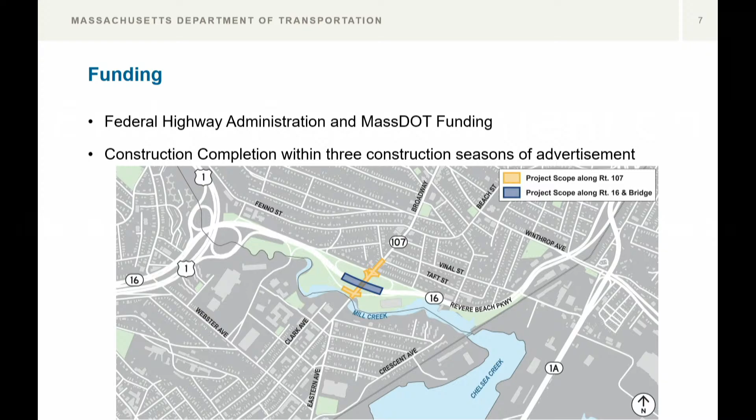In 2021, Massachusetts Department of Transportation issued a design notice to proceed for Howard Stein Hudson for their design services. In August of 2022, Howard Stein Hudson submitted the preliminary structures report, and it was approved by Mass DOT. Then a subsurface exploration program was conducted, with the bridge type selection worksheet being approved in October of 2023.

Mass DOT reviewed the pre-25% conceptual design in January of 2024, and you may remember, if you were here in March of 2024, we presented that conceptual design at a public information meeting. In July of 2024, the 25% design was submitted to Mass DOT and then approved in early winter, and we're here tonight to present that to you.

So what is our agenda tonight? We'll begin with the project location. Then we'll talk about how the project was initiated, including the existing conditions of the bridge. We'll discuss the goals of the project, the alternative analysis and proposed design, our anticipated construction approach, how the construction may affect our roadway users, the next step after tonight's design public hearing, and then we will open the meeting up to questions and answers.

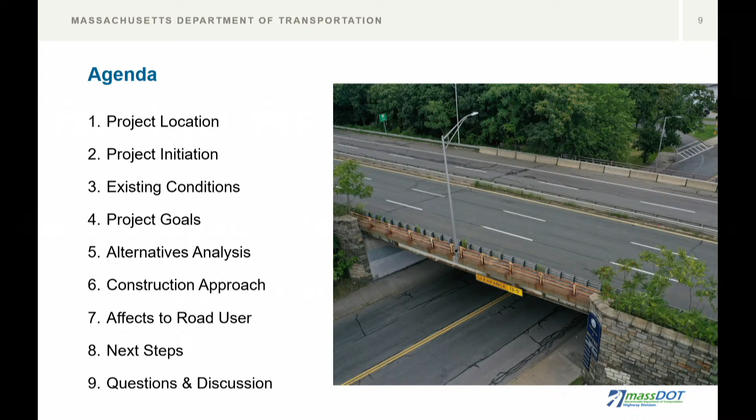So where is the project located? The bridge replacement project is located on Revere Beach Parkway over Broadway. The project scope also includes improvements at the intersection of Revere Beach Parkway eastbound and westbound ramps and Broadway, or the residential portion of Revere Beach Parkway. The project along Broadway stretches approximately between Mill Creek and just south of Taft Street.

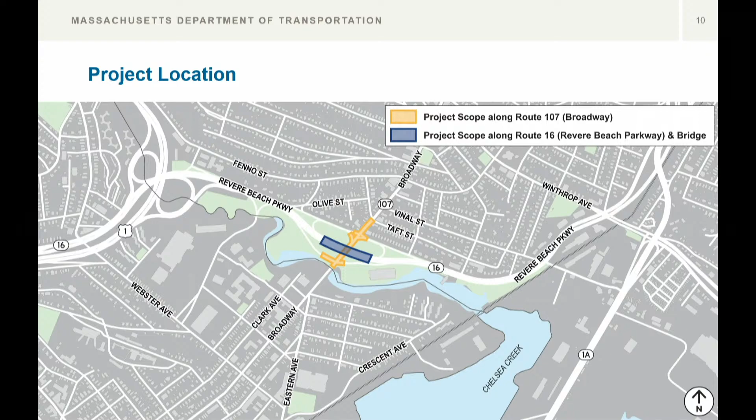So how was this project initiated? The bridge was built in 1930 and then widened in 1958. As you know, the bridge is vital to the Commonwealth as it provides local connections between Medford, Everett, Chelsea, and Revere. The bridge also provides regional connections between Route 1, Route 1A, and Interstate 93.

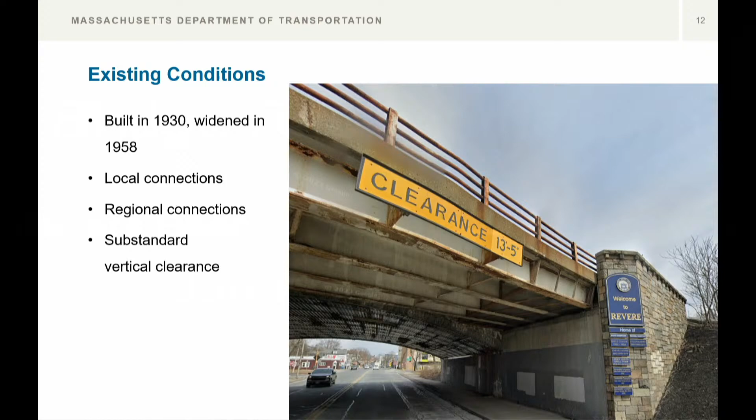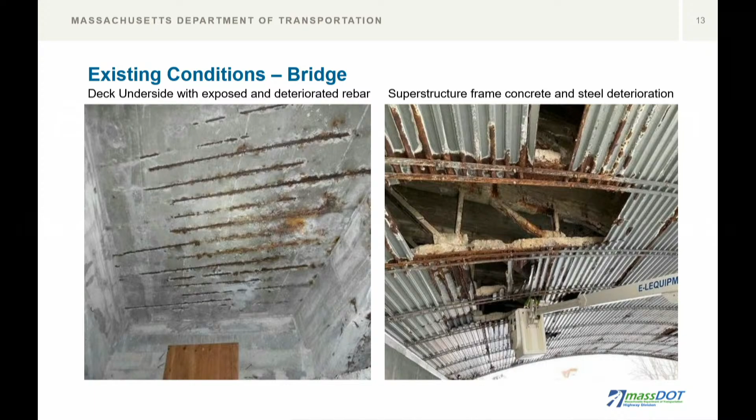The existing bridge over Broadway currently provides substandard vertical clearance. As you may be aware, the reason for the project is that the existing bridge is in poor condition. There are numerous noted deficiencies, which is why Mass DOT has identified this bridge for replacement. Shown in the left photo is the underside of the bridge, where you can see exposed and deteriorated rebar. The photo on the right shows the superstructure, or the top portion of the bridge, with frame, concrete, and steel deterioration.

The existing bridge is currently undergoing structural repairs. That project is separate from this Mass DOT project, and it was initiated by the District 4 office. Our project team has been made aware of the repairs and have been kept in the loop so that we could determine if there are any conflicts or concerns from that project that would affect this full bridge replacement project.

The pictures shown here are from Mass DOT's latest bridge inspection, performed in May of 2024. As you can see, there are areas where the concrete has completely spalled or separated off from the existing steel trusses that are heavily deteriorated. The inspection is what prompted District 4 to take action to begin the repair prior to the bridge's full replacement.

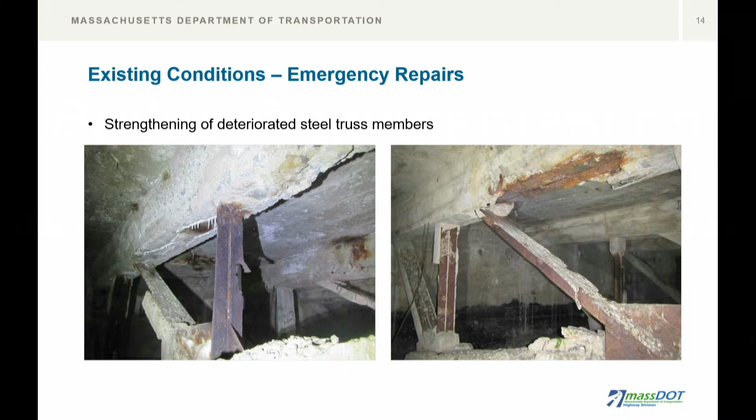The repairs are scheduled to begin very soon and continue through the winter months, and weather permitting, be completed in April of 2025. We anticipate the bridge reopening to its previous existing conditions sometime in May of 2025. Should you have any specific questions regarding the repair project, please wait until tonight's design public hearing is complete for the full bridge replacement project, and we'll have personnel here tonight that can meet with you to answer those questions separately.

Now, moving back to the full bridge replacement project, this is a picture of the existing roadway. As you can see, Revere Beach Parkway has two 11 to 12-foot westbound travel lanes and three 11 to 12-foot eastbound travel lanes. A median is provided, which separates the two directions of travel. The average daily traffic volumes are 23,000 vehicles per day in the eastbound direction and 15,500 vehicles per day in the westbound direction. Currently, there are limited pedestrian accommodations and no bike accommodations along Revere Beach Parkway.

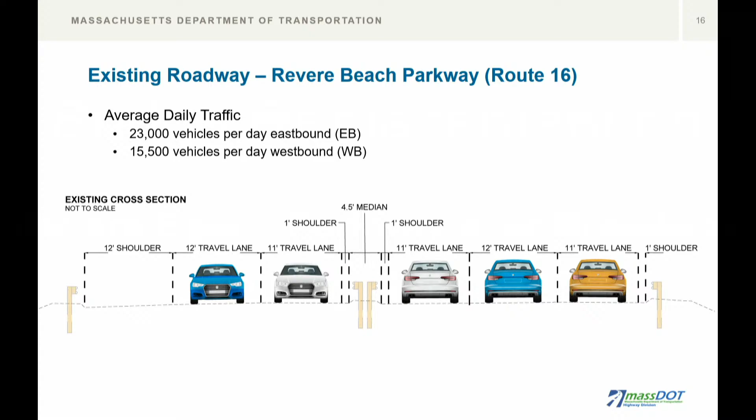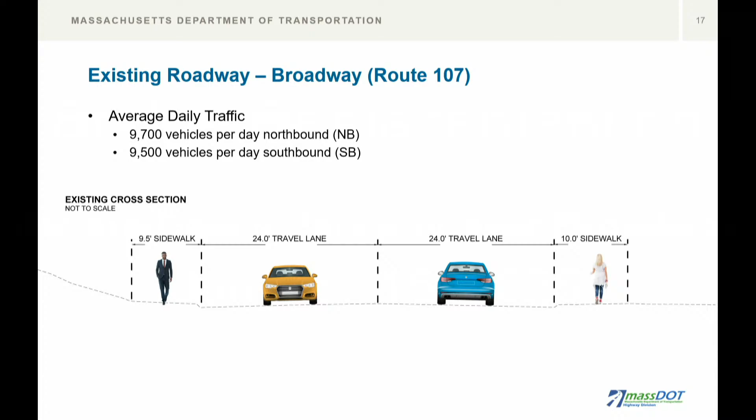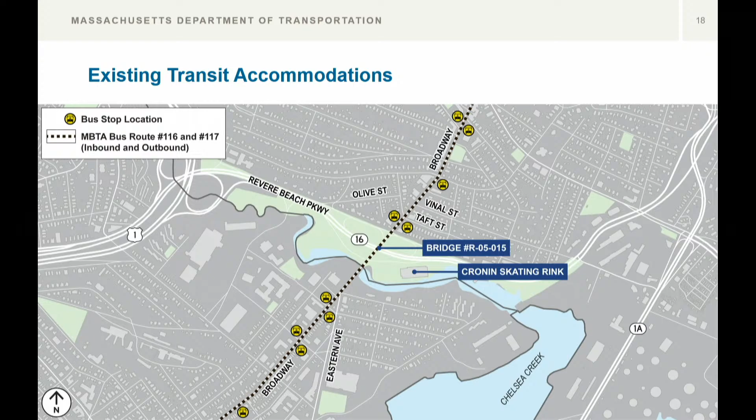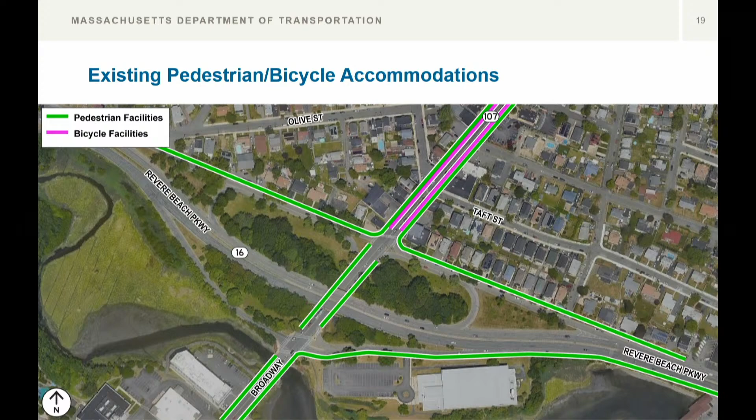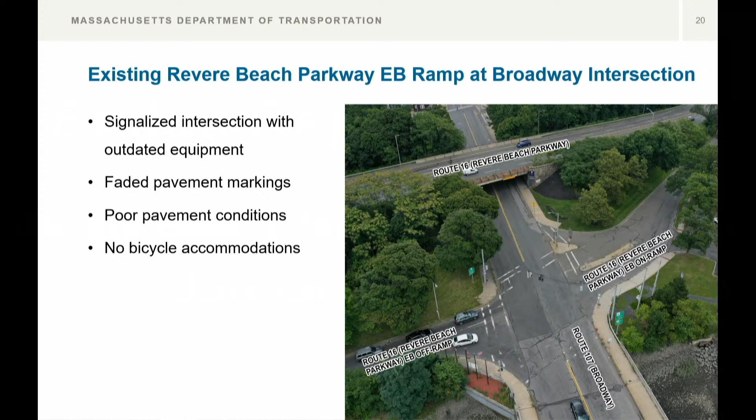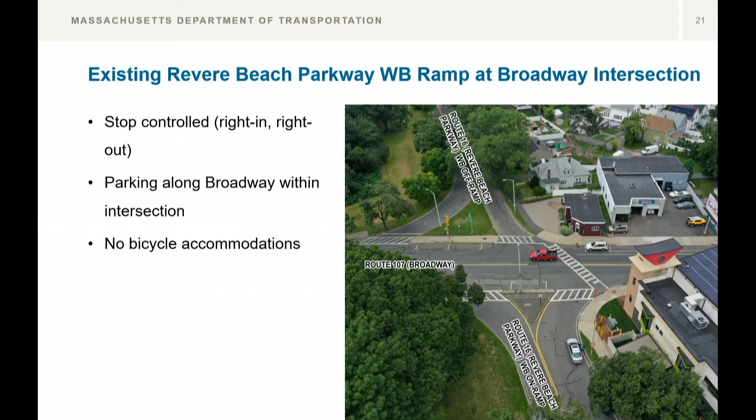So what do we want to accomplish with this full bridge replacement project? Now that we've reviewed some of the existing problems with the bridge, how do we plan to resolve these problems and provide a safe bridge on the Revere Beach Parkway over Broadway, and improve Broadway for all users while meeting current standards? Paul Barthum, the manager of structural engineering for Howard Stein Hudson, will now discuss the proposed improvements and goals of this project.

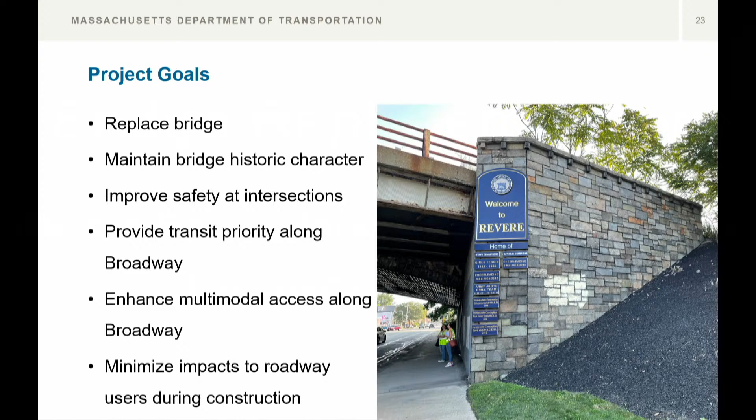Thanks, Christine, and good evening, everyone. As Christine indicated, the primary goal of the project is to replace the existing structurally deficient bridge with a new modern bridge structure while maintaining the existing Broadway traffic below the bridge. The existing bridge was constructed in 1930 and widened in 1958, and the bridge deck and superstructure are in poor condition. We are looking to replace the bridge but maintain its historic aesthetics. We are also looking to improve intersection safety, enhance multimodal access and transit priority along Broadway, and minimize impacts to roadway users during construction.

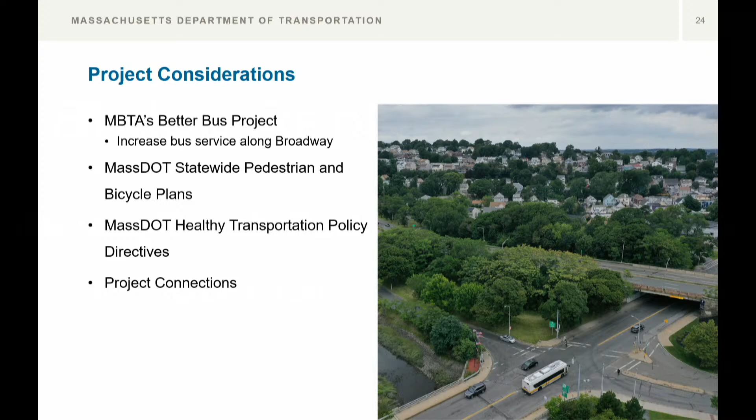Other project considerations made part of the design are the MBTA's Better Bus project and their goal to increase service along Broadway within this corridor, MassDOT's statewide pedestrian and bicycle plans, MassDOT's healthy transportation policy, and making connections within our project to projects being completed by others.

As previously mentioned, the project scope includes complete removal and replacement of the existing bridge structure. As part of that work, we will need to rebuild Revere Beach Parkway to increase the profile over the bridge. Raising the profile of Revere Beach Parkway is required in order to improve the vertical clearance over Broadway. As the existing bridge is on the National Register of Historic Places, we also intend to maintain the historic character of the existing bridge.

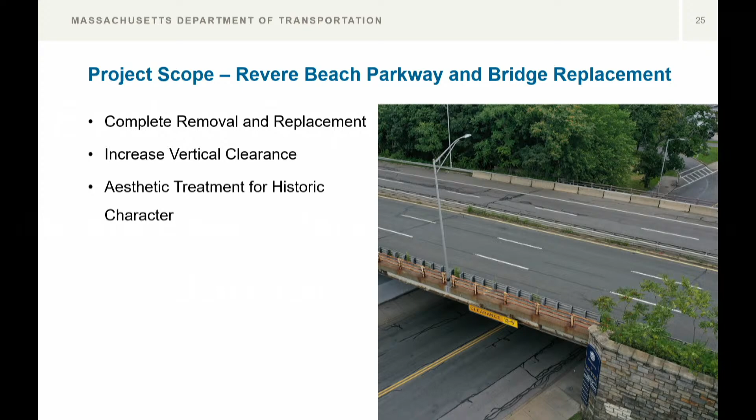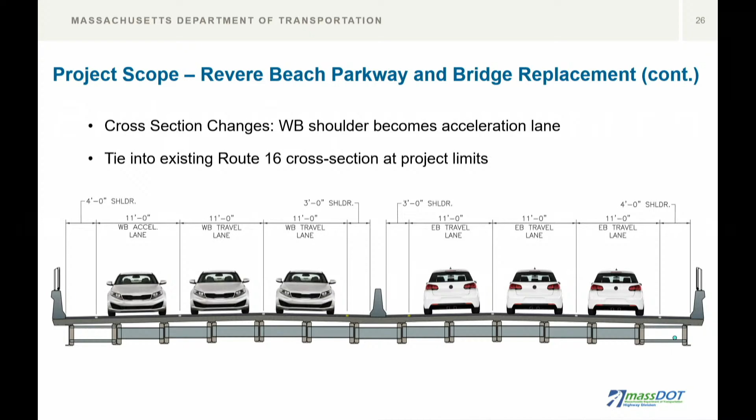We are proposing to make minor changes to Revere Beach Parkway in the final condition. However, we are proposing that the current westbound shoulder become an auxiliary lane to assist traffic merging and diverging onto Revere Beach Parkway. The project proposes to connect back into the existing Revere Beach Parkway configuration at the project limits.

The limits of our project begin at the Revere-Chelsea city line to the south and continue north underneath the bridge up to the Taft Street intersection. We intend to reconstruct sidewalks on both sides of Broadway, add bicycle accommodations, and include bus priority measures, including bus lanes where feasible.

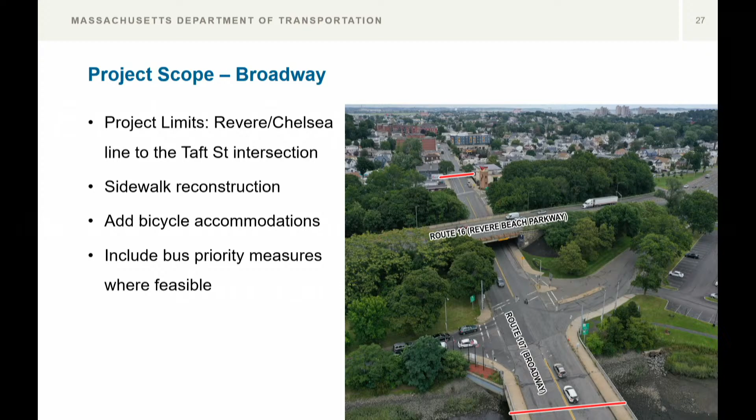The Revere Beach Parkway eastbound ramp intersection, pictured in the upper right, is currently a signalized intersection that requires improvements and upgrades along with multimodal accommodations and ADA-compliant curb ramps and crossings. The Revere Beach Parkway westbound ramp intersection, pictured at the bottom of the slide, is a stop-controlled intersection with right-in, right-out access, which requires improvements to multimodal accommodations and ADA-compliant curb ramps and crossings.

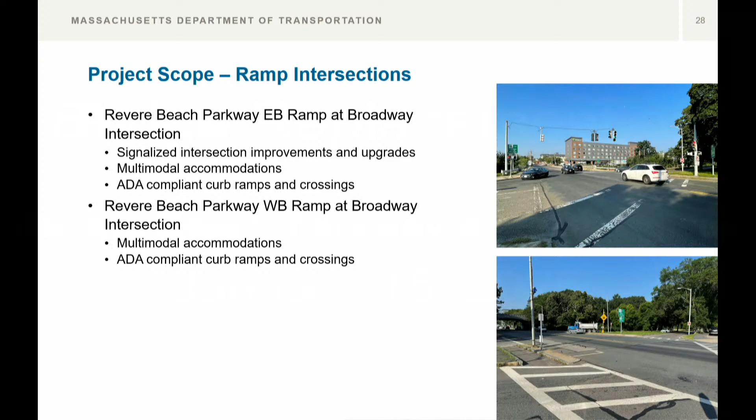In the following slides, we will discuss some of the design alternatives we have considered for the project.

For the bridge replacement, we considered many options, but only two viable options were determined to suit this site: a spread pre-stressed concrete box beam superstructure and a spread steel stringer superstructure.

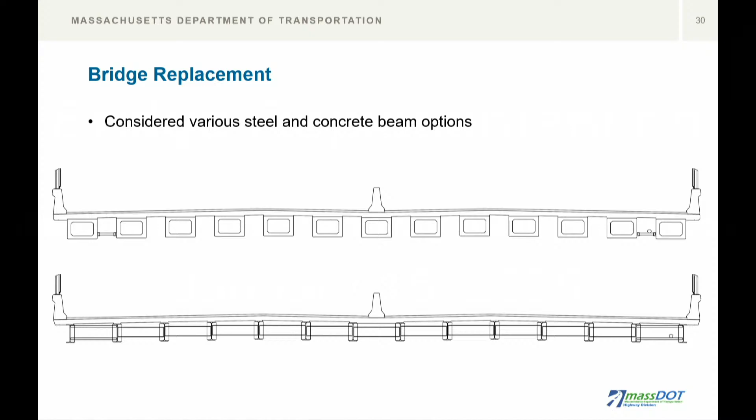For the intersection alternatives, we evaluated control strategies based on safety, cost, environmental impacts, traffic operations, and multimodal accommodations.

For the Revere Beach Parkway eastbound ramp intersection, we determined the signalized intersection was the preferred control. Other alternatives had additional right-of-way impacts, potential impacts to the Broadway Bridge over Mill Creek, and impacts to the Revere Beach Parkway Bridge, and therefore were determined infeasible.

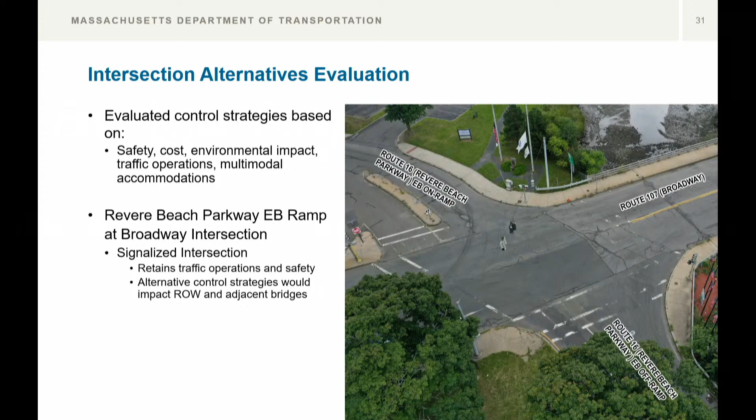The Revere Beach Parkway westbound ramp was analyzed as an unsignalized intersection, its current condition, a signalized intersection, and as a roundabout. The results of the analyses showed that the unsignalized intersection has a high benefit to cost ratio, limited environmental and right-of-way impacts.

There are currently limited safety concerns. The signalized intersection showed that the cost of the signal would outweigh the benefits, and the roundabout had very significant parkland impacts.

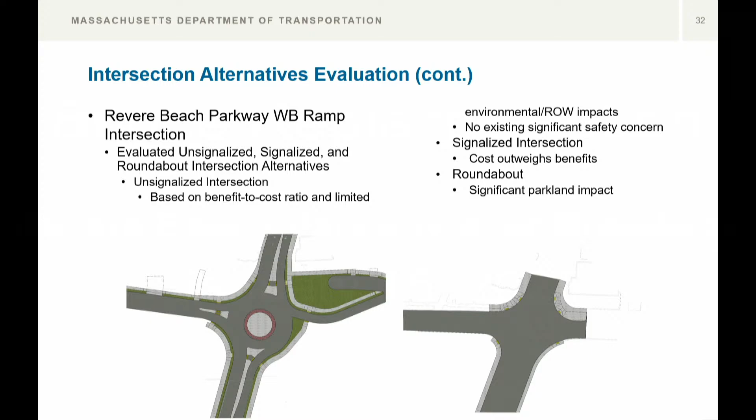What is the preferred alternative?

The preferred bridge alternative is a simple span steel stringer bridge with a reinforced concrete deck. This structure more closely represents the historic bridge structure being replaced than the other alternatives.

As you can see from the graphic shown, the Revere Beach Parkway would include new pavement, pavement markings, and barrier to be installed within the limits shown.

The proposed design also includes adding an auxiliary lane between the on and off ramps to and from Broadway to allow vehicles more time to accelerate and decelerate when entering and exiting Revere Beach Parkway.

Broadway provides new pavement, pavement markings, and signage, an ADA-compliant sidewalk, all-day bus lanes in both directions, and 11-foot travel lanes in each direction.

The Revere Beach Parkway will have three 11-foot lanes with variable width shoulders eastbound, on the right side of the graphic, and will have two 11-foot travel lanes, an 11-foot auxiliary lane with variable width shoulders westbound. Eastbound and westbound traffic will be separated by a variable width median.

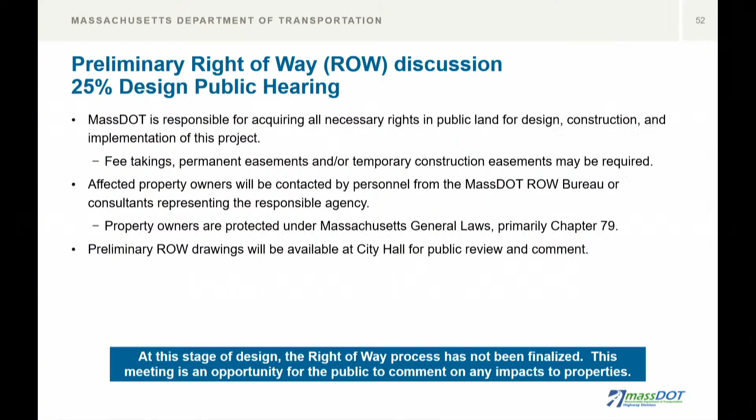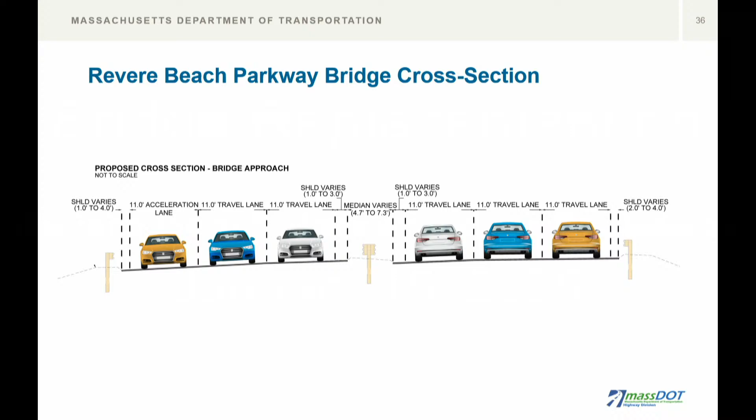That will be your new conditions after the full replacement project.

Yes, go ahead. Chris Crombie, 4 Kids Only After School. I'm one of the directors of operations for the business at 85 Broadway, one of the affected addresses. As my coworker Tabitha mentioned, we have about 80 children currently coming to our after-school program every day, and about 15 staff, with a lot of people exiting and entering the building. I look forward to speaking further about how we'll be affected, because right now, with pickup and drop-off already on Broadway and the congestion that exists during rush hour, we anticipate this making operations a bit more challenging. From our company, we look forward to speaking with everybody involved to make this as little of an issue for us as possible.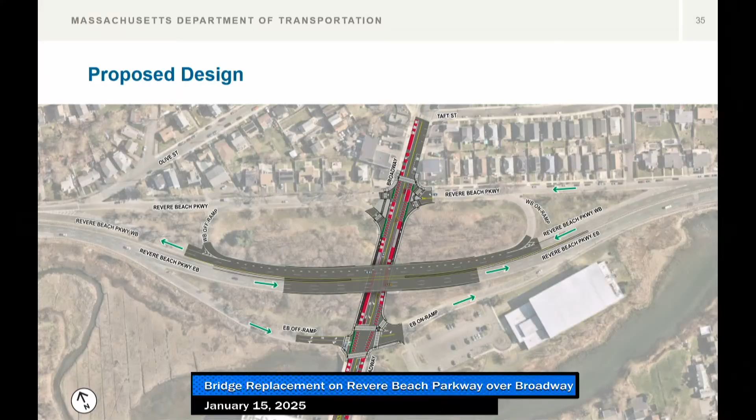Yeah, do you mind going back to the slideshow, please, Andrew? Thank you. Do you want me to show you?

Yeah, just maybe pick up stage one.

Okay, so because we need to construct the bridge in 3 stages, we're going to have to excavate within Broadway, and we'll be relocating the sidewalks and keeping it safe in that area. But it would be really difficult to build all of Broadway right off the bat, so it's going to have to fall in stages, just because of how the bridge abutment is very tight to the roadway and to the back of the sidewalk.

I'm sure you can understand, if we've got to dig a hole - the existing bridge is a 3-sided frame and it actually goes down fairly deep, probably about 8 feet. So we're going to have quite an excavation occur there, with steel sheeting or support of excavation to support the roadway and sidewalks. That's why it would be difficult to build all of Broadway at first.

Right, the full duration, I understand. I think the further you go northbound, particularly the flashing beacon crosswalks and improved sidewalks in that area, I suspect would be less impacted by the construction work itself. If we could do something about getting that work moving a little quicker - sure, we can take a look at that. The bus lanes don't need to be in place anytime soon. Yeah, that's fair.

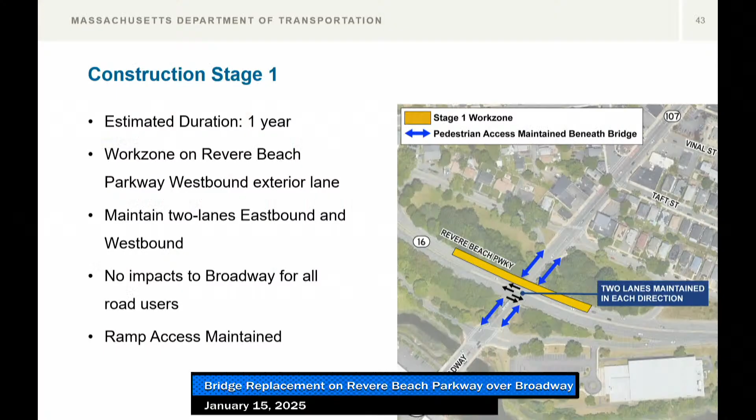The reason for the swap is because of the bus lane - we have to be able to transition the bus back into the general traffic flow without causing any safety concerns. So the best way we could see to do that was to provide the bus stop closer to the intersection, transition them back into the flow of traffic, and move those parking spaces a little bit farther. This also gives better access from the bus stop to the crossing, which will have the rectangular rapid flashing beacon. So it's moving the parking spaces about 100 feet.

Thank you. Will the beacon be next to the spot for the bus stop, or by Taft Street? That's going to be at this crossing that's at the ramp intersection on the north side.

Thank you. My concern would be that now there's going to be a lot of in and out of the parking space with families picking up children. Sometimes I see the bus picking up at like 4:35, whatever the route is. I'm concerned about accidents, to be frankly honest, because now they are in front, they are going this way, and the parents are either taking a right or a left.

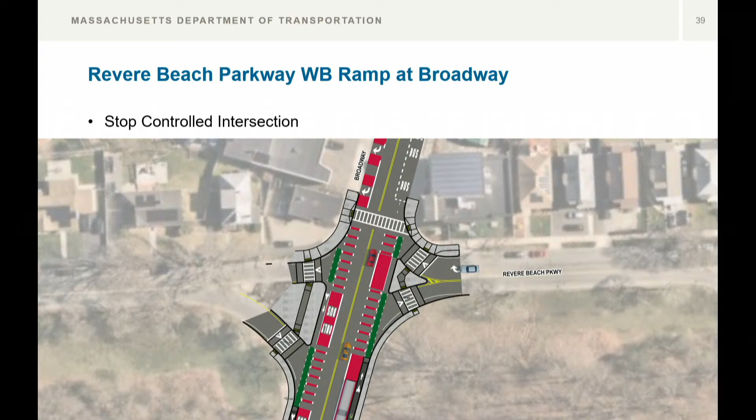Juan Jaramillo, 121 Broadway. Hi. I don't have a question, I just want to add to what the guys were concerned about.

We also have extremely low lighting there. If Murray's sign is off for any reason, you have no lighting at all there. It's really poor lighting. During the winter, when it's dark at 5 o'clock and kids are getting off buses, it's going to be challenging for you guys. I'm adding this because we've been asking for lighting everywhere on Broadway, but we don't have it yet. Thank you.

Just one more comment based on what he said. I live in that area and do a lot of walking around. All that property near the Cronin Ice Skating Rink and where Route 16 and 107 cross, that whole area, even near the school and Youth in Motion, none of those lights work. That's National Grid, that's Mass DOT jurisdiction. You need to contact Mass Highway and tell them that whole area is dark at night. I could go around and take the numbers off the poles, but that whole area is very dark, and most of the lights don't go on at nighttime.

I've had interactions with Mass Highway about picking up leaves and trash in the area, and they're tough to deal with. They keep telling you we don't have the manpower, we don't have the equipment. A couple of years ago, when Governor Baker was governor, the Department of Conservation and Recreation had that whole area. They took care of it, they're park people, they picked up leaves and cut the grass. Now when you call Mass DOT, they tell you they don't have the equipment, no leaf blowers, but it's still their responsibility. So why don't they buy the equipment they need and fix the lights?

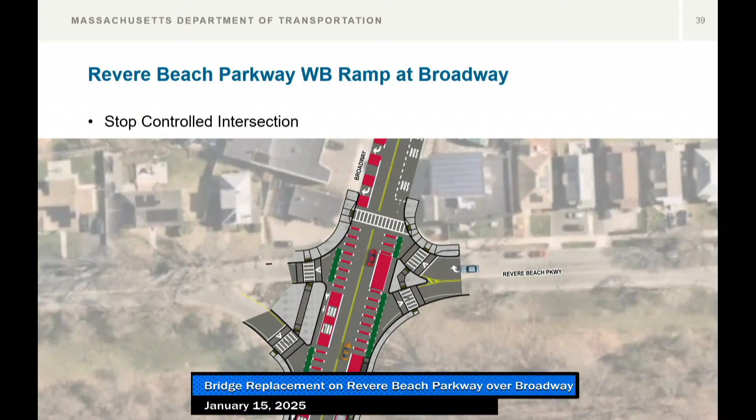Can you show the slide again? So that loop we showed is the workaround, but that's only for night work from 9 p.m. to 5 a.m. Otherwise, we'll always have 2 lanes open in each direction on Revere Beach Parkway. Okay, sounds good, thank you.

I know it's misleading the way we present it, but that workaround is only from 9 p.m. to 5 a.m. Okay, thank you. You're welcome.

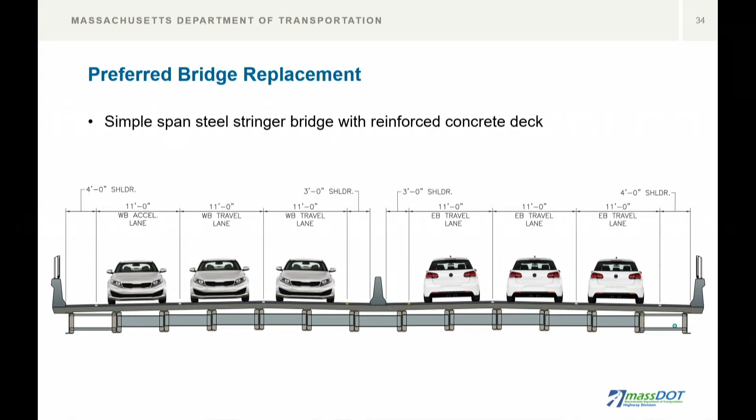Any other questions for the full replacement? When is the first phase starting - has there been a definitive date yet for the full replacement project? I do not know, I'm not here for that. They'll answer those questions after this design public hearing.

If we're done with replacement questions, we can get going with the temporary repair questions. I just have to formally close the hearing first. Any other questions for the full replacement project?